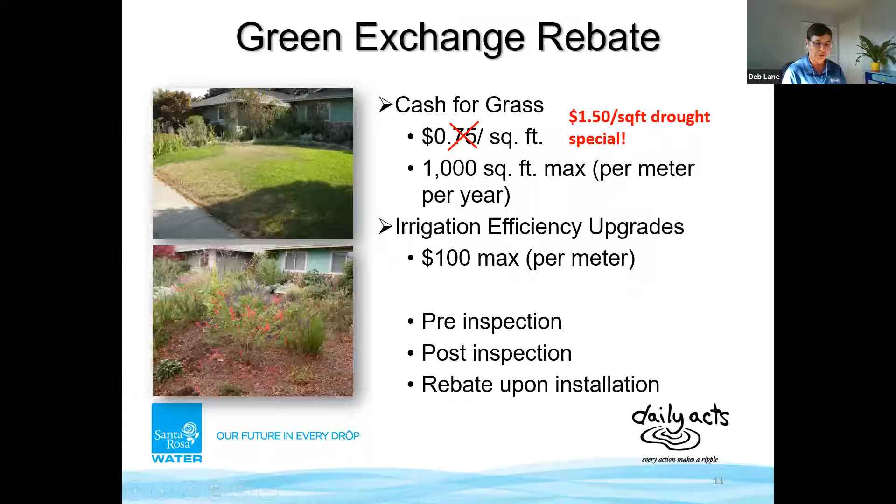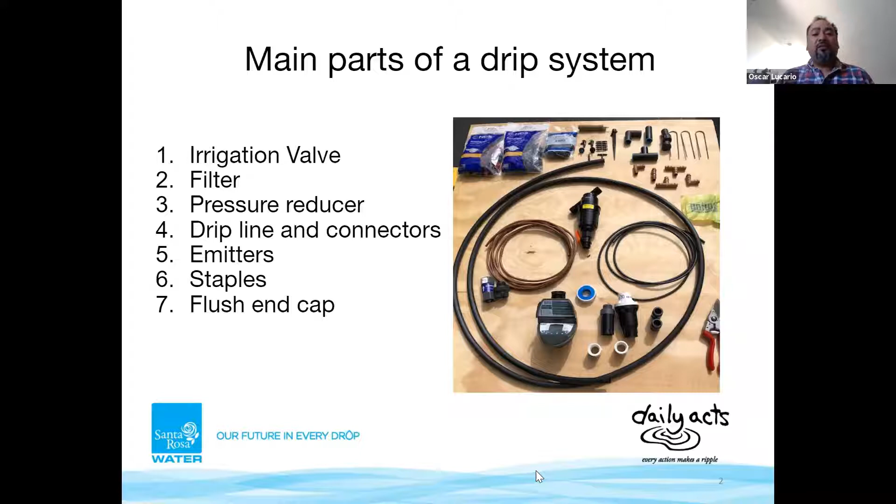For our drip system to work, we need to take that pressure and bring it down to about 30 PSI, which means we want to irrigate very slowly and profusely so it can really penetrate into the ground. Next to it, we have drip line and connectors.

There's several types of drip lines. The most common is polyvinyl. It comes in 1/2 inch, 5/8 inch, and there's a 1/4 inch small one.

We also have emitters that go along with the drip line system, staples, and very importantly at the end of our system, we need a flush end cap because we've got to maintain this system. Part of maintenance is flushing it once or twice a year, after the rainy season, to remove any contaminants or lingering dust that could be there.

So next slide, please.

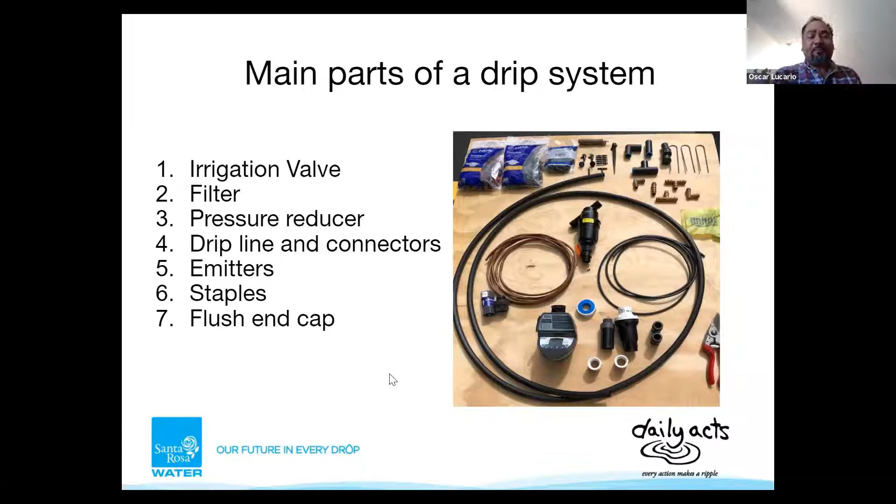Which means that when they're connected to a polyvinyl tubing at approximately 30 PSI, which is good enough pressure, within an hour of working they will drop about a gallon to 2 gallons, giving specific water needs to that plant, shrub, or tree, depending on how long we want to run the system.

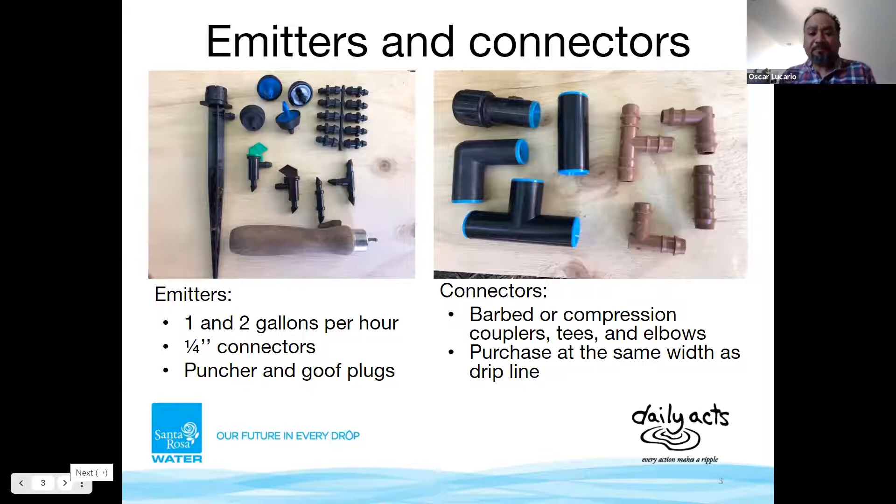Now we're gonna be talking about a drip line. So polyvinyl tubing, it's a pipe that comes in 50 feet, 100 feet, or 500 feet lengths. This polyvinyl is very inexpensive, and it's basically our hose distribution for water.

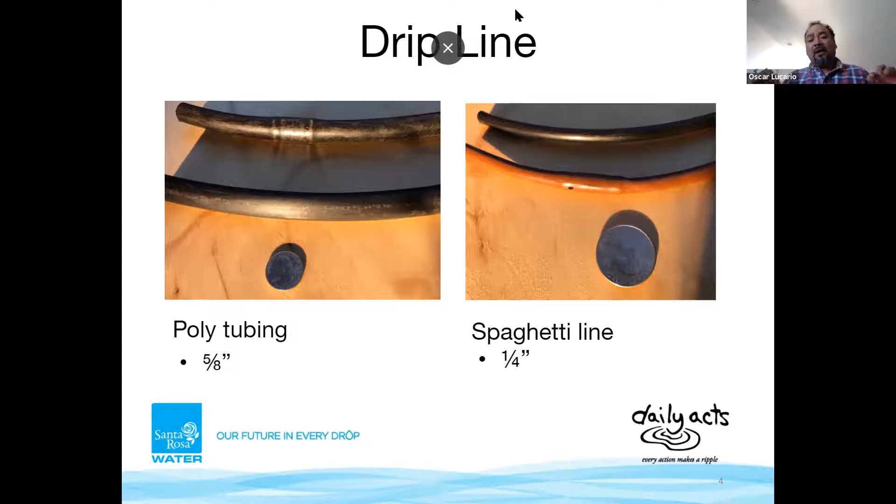Now, even though this is kind of tiny and mighty, it can provide so much deliverance of water when needed in areas like planters, veggie gardens, and raised beds. This tiny, mighty spaghetti line can do a lot of good work, and just because it's small doesn't mean it won't deliver what we want.

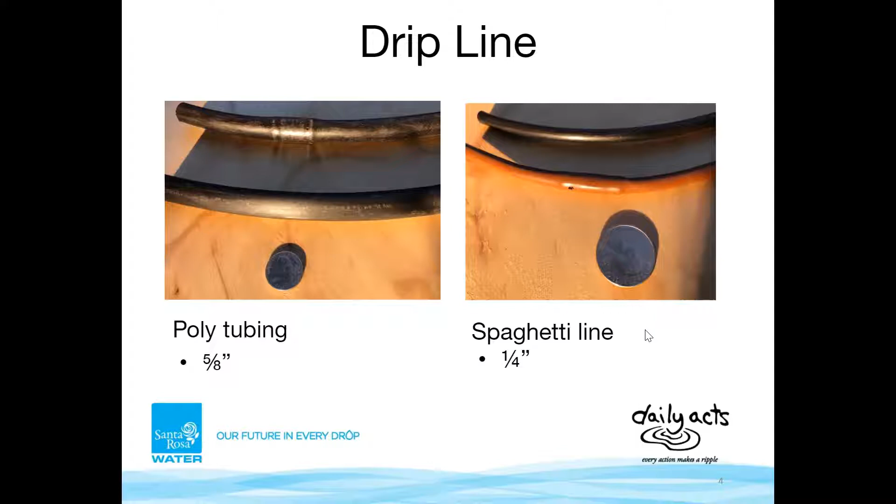Next slide, please. Oscar, I have a question for you from Linda Price. She's asking, how can I tell what size line I already have so that I can buy more, assuming she no longer has the packaging to see?

Oh my God, great question. I run into those things all the time. Previously, years back, we used to carry a 1/2 inch polyvinyl and then the 5/8. So what I recommend is you snap a little piece of that polytubing and bring it to an irrigation supplier and try to make it fit in a fitting.

Now, those fittings that you may find are 1/2 inch or 5/8. So it's one of those. And if it's the small one, that will be spaghetti line, which is a quarter of an inch. Thank you, Linda, for your question. That's a great question.

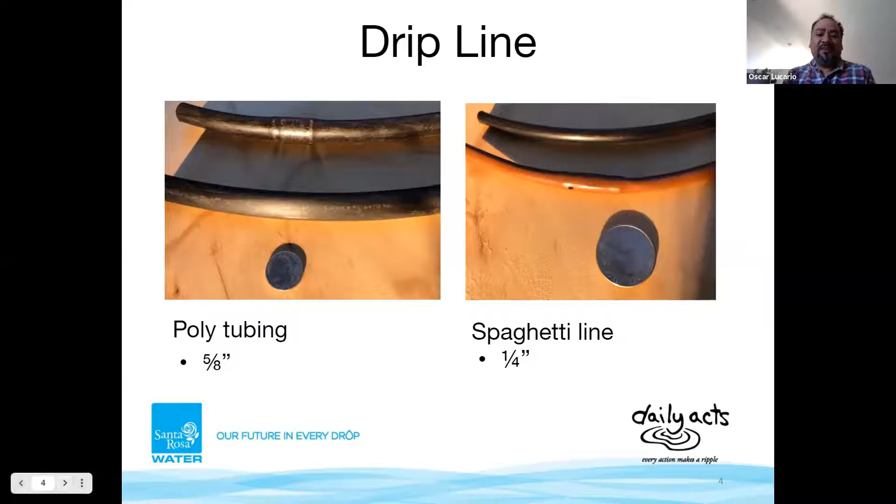So we explored some of those components that we use in our irrigation installation, but let's see how it all functions and how it all comes together. If you live in a residential area or a community place, like I live in a condominium, we share all of our green spaces with our neighbors, so we all kind of know where those irrigation supplies are because our kids play around the area. So if you live at home, you probably know where your valves will be.

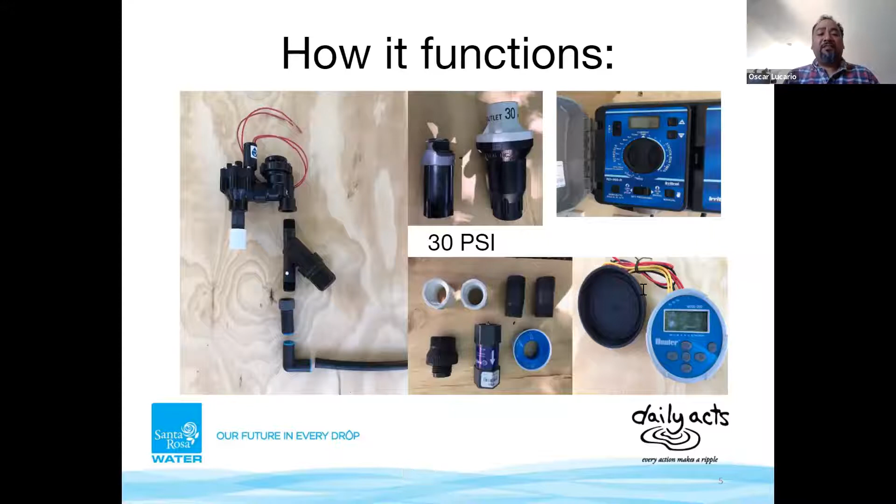To the left-hand side, it's an anti-siphon valve. It's basically one of the first components that your water will enter before it hits your garden.

The way it works, water comes in through the piping, goes into the valve. The valve has a solenoid, which means it works by electricity, put together by a timer. Depending on how we time or program that timer is how this valve is automatically going to open or close. Now, this valve also prevents any backflowing of water that has already been in the garden, so it actually functions as an anti-siphon valve as well.

After our valve, it goes down to a filter and also a pressure regulator that comes built into one piece. Now that piece is essential. As I mentioned, most of the water that comes to our homes comes at a higher PSI, pounds per square inch—60, 70, sometimes 100. And we want our irrigation to come down in pressure so we can deliver slow and steady water to our vegetation areas.

Then after that, it goes into a polyvinyl connector, and from there on, it's just polyvinyl tubing, emitters, and a flush cap. Now, you see here there are several types of pressure regulators. There are very expensive ones that are 30 PSI, about $20. There are some cheaper versions, about $7. Same thing with some of the check valves and pressure reducers—there's a whole variance in price.

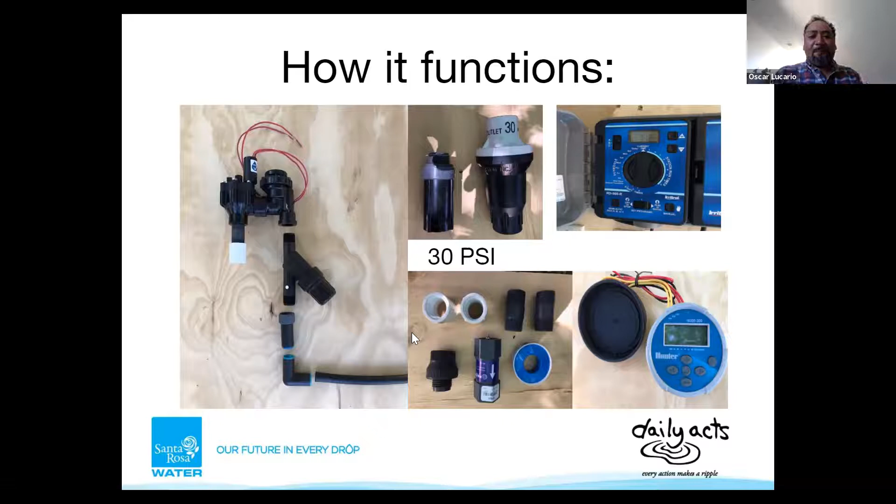I want to spend a little more time on the anti-siphon valve because it's such an important component. We want to avoid backflow of water from the irrigation landscape into the potable water at home. This anti-siphon valve works by a solenoid, or sometimes can be manual, but it still prevents water from the garden from coming into our drinkable water.

We want to protect our drinkable water because sometimes when you have lawns, we tend to fertilize them using petrochemicals. Certain chemicals, if they go back into the line, can not just corrode our piping, but we could also ingest them. There could also be herbicides and pesticides, so we want to make sure we have a good working anti-siphon valve for our project.

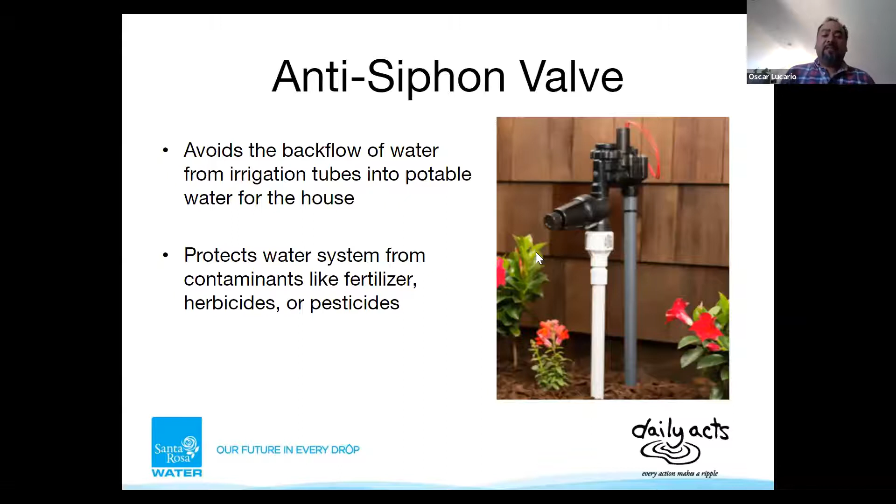We need to stop wasting water. We need to control our water in a better distribution way, which a drip system allows us to do, maximizing efficiency. Putting a lot of water too fast, too quick, doesn't really allow our irrigation water to go down into the ground to feed our plants, even our lawns. So we need to slow down the pressure and maximize an efficient way to deliver water specifically to a plant and conserve water.

To be honest, it's time to do it now, and what a better opportunity to walk away today with the idea to do that at home.

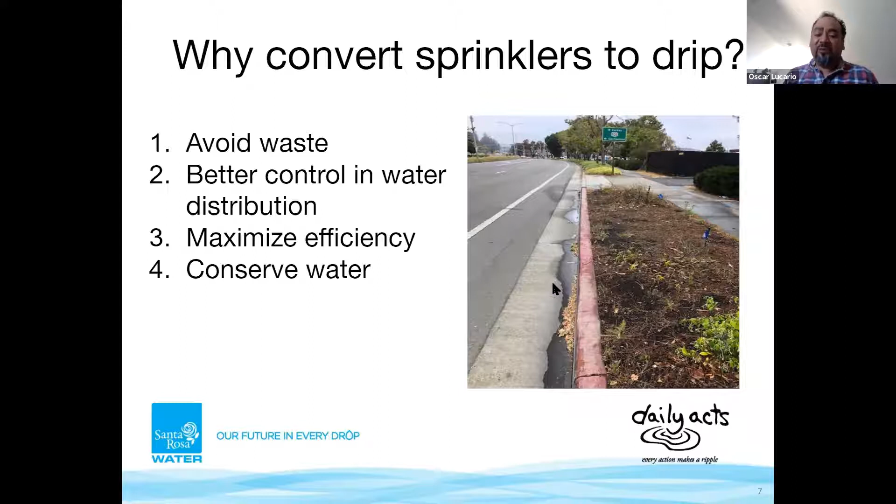Now, if you have a larger landscape, I like to call this the point source of irrigation. You use a solid polyvinyl line and only bring water to the specific root zone of a plant or shrub. It's very easy to install and affordable since it's just a solid line of polyvinyl tubing. When you get close enough to the plant you want to irrigate, you punch a hole and drop in a bubbler, depending on the water needs of that specific plant.

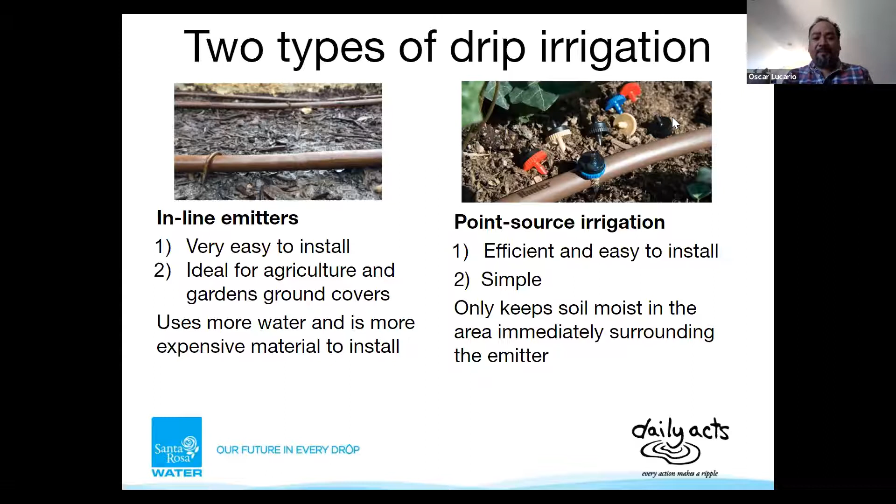Next slide, please. I am going to interrupt here with a question: how often should you change your filter?

That's a great question. The inline filters on the market nowadays come with a flusher screw cap, so I'd be cautious and do it maybe twice a year. If your system runs about 5 months out of the year—we turn on irrigation around early May and turn it off around Halloween—that's good irrigation for 5 months. So I'll flush it twice a year, every couple of months, to get rid of any contaminants, tiny plastics, or rocks that could cause malfunction to your emitter system. Good question, thank you.

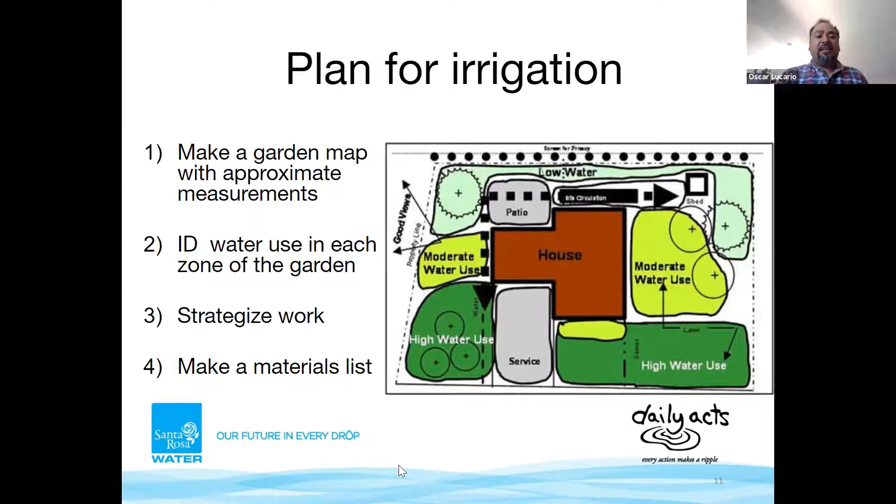So now we've talked about all the parts in irrigation and briefly touched on the areas within our home. It's time to make a plan of action, and that means we start with a map. This is kind of the coolest thing to do. It's time-involving and may be frustrating at times, but this is your framework—this is where everything really meets, and it's going to help you plan how you're going to assess what you have at home.

We start by making an aerial picture of your home. You measure your front yard, your backyard, and identify your hydrozones and the specific needs of your garden. Again, the specific needs of water in your garden or home tell us what type of irrigation, drip line, and volume of water we need to run in those areas.

And then number three—sorry, my Spanish comes through—we need to strategize the work, which means a drip line system is mostly about planning and thinking what technical supplies we need to get. But once you have a plan and a map, stick to it.

Because 5 years from now, when you're digging through these areas and you want to plant more fruit trees, you're going to run into your existing drip line, and you're going to be frustrated that you don't know where this map is. So please, keep this map along the way—it will help you be less frustrated in the future if you keep a record on it.

And then start making a material list. Once you take a measure of what you have, you can begin to think about your list and keep it in a way that works for you. Next slide, please.

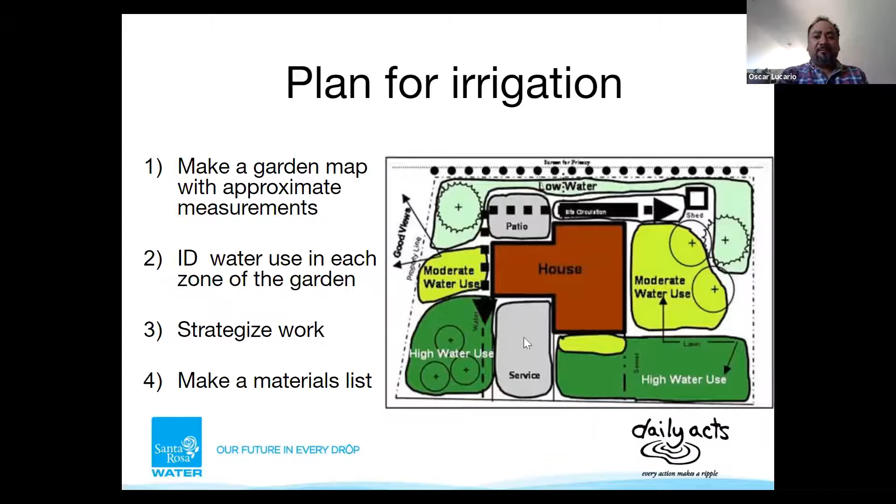So we're now at the point where we no longer see lawns being part of our landscape, given the water crisis that we're in. And the city of Santa Rosa has an amazing rebate program. So if you're interested in shifting your sprayer system from a lawn into a more ecological landscape, this is the time to do it.

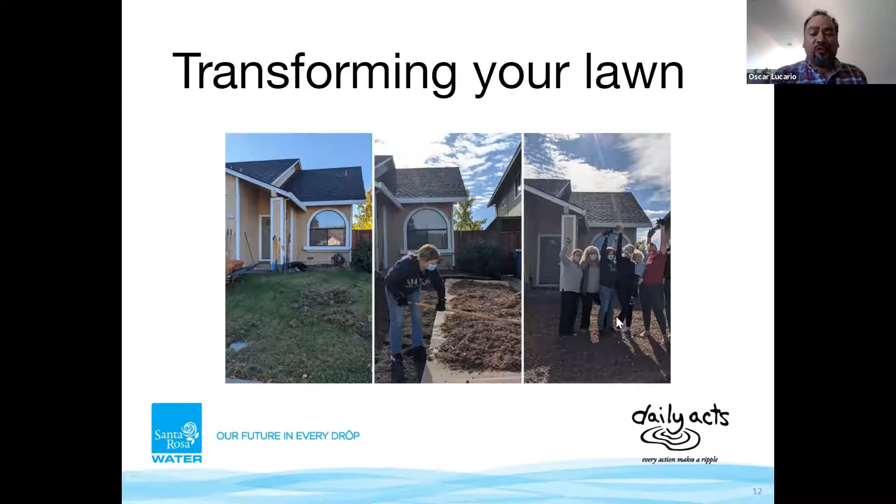So look at the opportunity at home when you see the browning of the grass. What can I do? What's gonna be the next step that is sustainable, that empowers me, that creates a better habitat and provides me quality of life? All these items can be put together by you, your friends, and your family to really empower your community and your home to be more resilient and more conscious of the time we're living in. Keep in touch with Daily Acts because they'll have some workshops coming up next. Next slide, please.

So imagine this: you have that browning lawn at home and you're like, okay, I'm done with this lawn. How can I turn this sprinkler system lawn into a drip line system? Well, a lot of people have done it—many suppliers already come with kits. But one of the main things we need to do is flag the sprinkler heads that you have in your lawn area.

Then basically we go and dig out and cap each of them, and we only keep about one—that's going to be your source of irrigation. That source of irrigation is going to have a filter and a pressure regulator. Again, when we use sprayers, we use a lot of pressure and flow to disperse water through the landscape. But drip irrigation is the whole way around—it needs to be slow flowing, slow to the ground. So it's a whole different view than what we're trained our eyes to do.

So part of it is to have a sprinkler-to-drip conversion system, and those kits are very easy to get. I'll point out some sources—not just businesses, but local hardware stores that may have them. It's really kind of a one-day project if you want, and it's a good way to assess what you have at home and make those changes as you decide what to do next with your landscape.

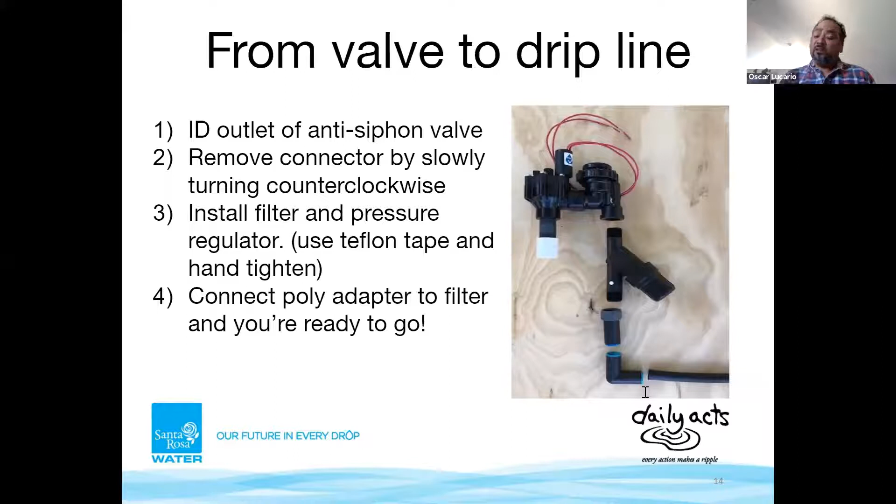This brings us to our next slide, which is how to set our drip system installation. This is the funnest part of all. You may require a collaborative effort, which means if you have a spouse, your kids, your community, your neighbor, this is a good time to call them in and help you out, because sometimes those rolls of drip line are quite heavy.

If you're thinking you're gonna put down a drip line to the front of your house, you may be talking about 200 linear feet of drip, and you may need somebody else to help you unroll the line. As you unroll it, you'll start using landscaping staples with a round top. The reason for the round top is you don't want to squeeze the polyethylene tubing when unrolling or installing, because plastic in a way has a memory, and if you constrict the flow of water, it can really affect how you deliver water to your system. You want to make sure your pipe is unrolling evenly without any effort. As you use your staples, make sure they go soft to the ground, maybe give it a pound or so to keep them in place every 2 feet or so.

Then the next thing to think about: once you get to your plant, you gotta decide what are the water needs of that plant. If you go to nurseries, I love going to Devil Mountain Nursery in Petaluma. They have an amazing assortment of plants, drought tolerant and native, and they even come with some water use information. So you get to think about how much water this plant is gonna need when it's new, and also the size of bubblers you're gonna be putting on each.

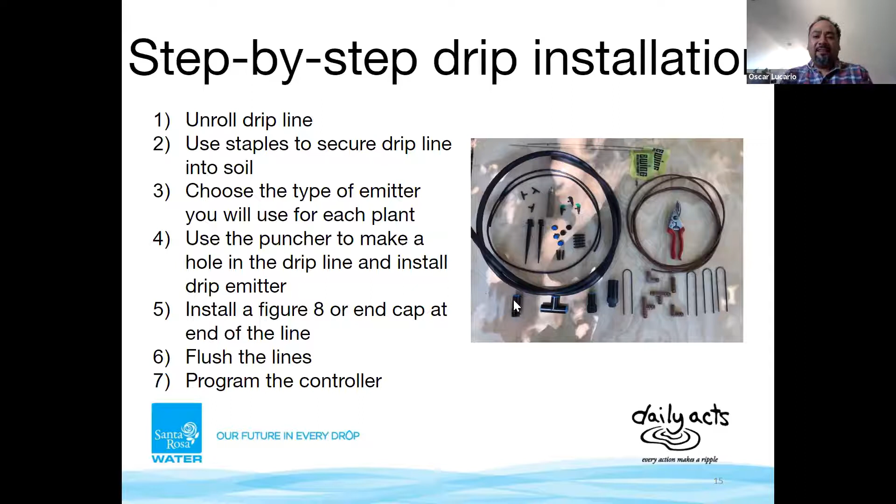I work with landscape, and water is an important resource, as well as soils. I want to spend a little time on this because without understanding the quality, the quantity, and the needs of our soil, any irrigation system you put out there, whether it costs $100 or $500, isn't going to get you the service you need. I hope this combination of soil, living soil, and an effective irrigation system will invite you to explore more. For that, I'm going to introduce you a little to what types of soils are out there.

Sonoma County has two very frequent types of soils. You have alluvial soils, which formed when volcanoes eroded and brought in amazing sediment that sits in the Laguna Plateau—an amazing agricultural type of soil. But you also run into clay soils. On the coast you run into more sandy soils, and silt is sometimes in between. There are also other growing mediums.

For example, what you encounter in pots or raised beds. What you have in a pot is potting soil, which isn't necessarily clay, sand, or silt—it may have some of that, but it's mostly medium. And when we have raised beds, like veggie beds, we always amend them with organic vegetable compost, so that's a lot of organic matter and less sand, clay, and silt.

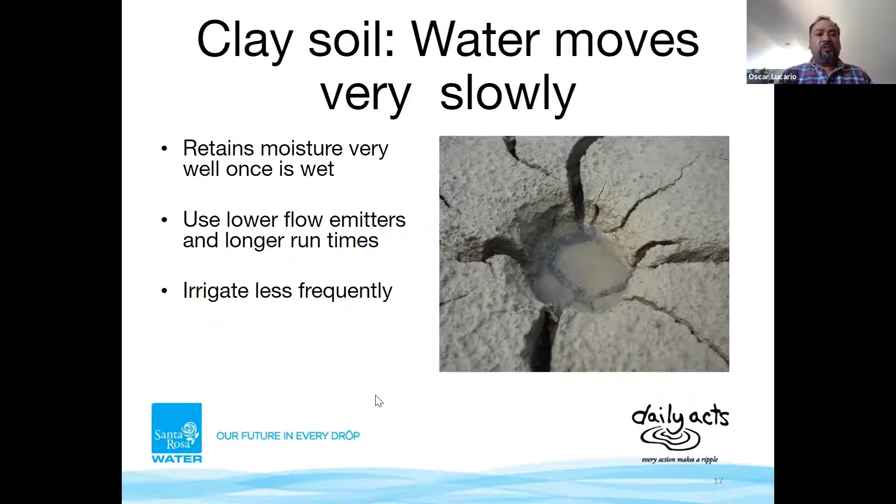So when we use drip line irrigation, we have to think about using very low flow emitters—instead of 2 gallons per hour, we can use 1 gallon per hour and double our time to allow slow percolation of that precious water into the clay soil. Also, because clay holds so much water, we don't need to irrigate as often—maybe 3 days in between, or about a week, which sounds pretty good for clay. You don't want to overdo your clay because it creates anaerobic conditions and can actually root kill your plants, so you need to irrigate less when you have clay soil.

You need to make sure your drip flow is nice and slow, and you have to understand that once clay is wet, it's going to take a long time for it to dry. Next slide, please.

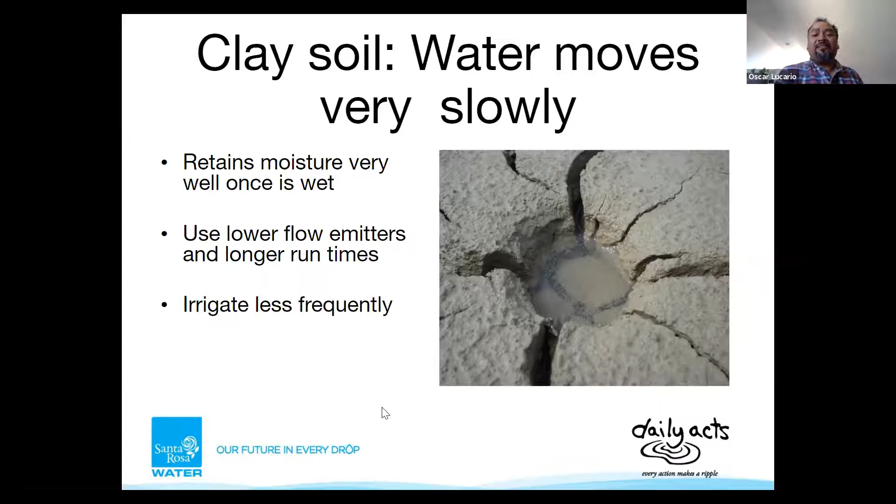So what happens if we have a sandy soil? Well, if you have an irrigation system working on a sandy soil, the water will flow through that sandy soil quite very quickly, which means we will pretty much be losing our water and our amazing moisture in our soil.

So what does that mean if we have a drip line system and we have sandy soil conditions? We need to irrigate more frequently, maybe for short amounts of time. Maybe water with 2 gallons per hour for half an hour, then program again for another half hour in 3 hours from that day. So you split that water so you don't just lose all your precious water down to nowhere, and you actually get to deliver it at the root zone.

So what I mean about the root zone - it's a great question. The most activity in bacteria and microorganisms is within the first 6 inches of your soil, any type of soil, which means that's where you want to keep the water available to plants. That's where you want your drip line to be slow, bringing that water down into the infiltration of that zone. And if you have sandy soil, you can drop in a gallon, stop, let it go, and then 2 hours later drop in another gallon instead of having 2 gallons at once. So that will be my consideration when dealing with sandy soil.

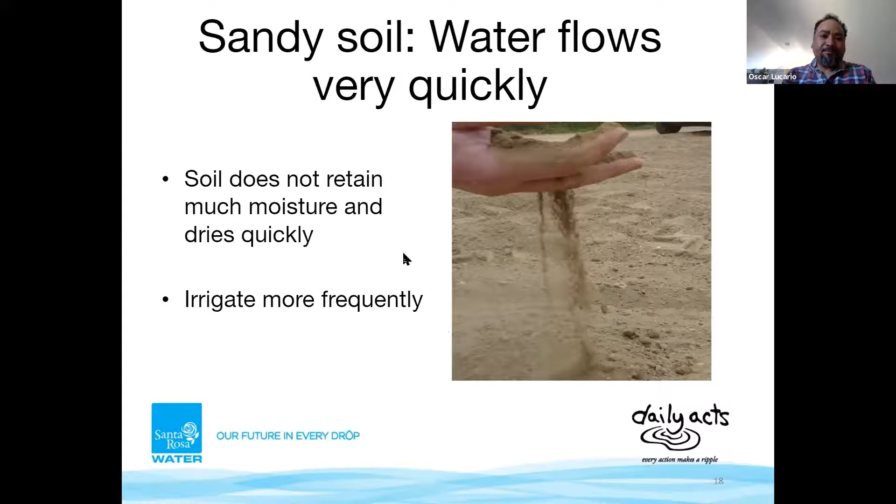And then there's in between, right? There's no just black and white, there's the in between. And silty soil - there's an amazing story about it. Many of our cultures throughout the world started agriculture because they lived next to banks of sand, next to rivers, and it was not necessarily sand, it was silty soil, which means all this organic matter just flowed around the rivers and provided tons of nutrients.

So it holds water beautifully, better than sandy soils. The fertility of silty soil is amazing. The only bad thing is that it erodes quite easily if you don't have the right irrigation, which means if you use overspray, your silty soil will be running away from it. So when you have silty soil, you want to protect it. You want to make sure your drip line system is that in between - not too fast, not too short, but steady - protecting your amazing silty soil from eroding.

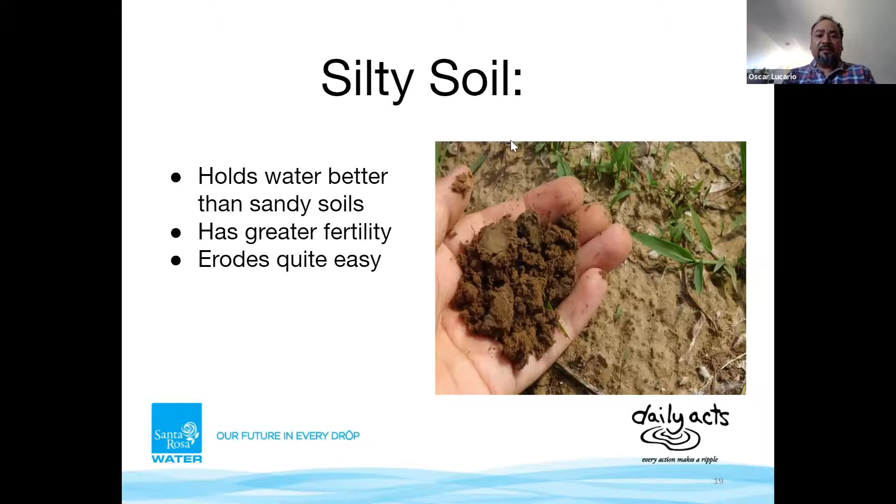And here's one big example. I live in a small backyard and I have raised beds. My raised beds are made of a medium, which is between potting soil, existing native soil, and compost. And I grow vegetables at home with my kids. So I have a medium - nothing in between clay or sandy or anything like that. We have just an amazing medium to grow.

And this is particularly interesting to me, because when we have plants in the landscape, we don't go and see how they're doing with water needs. But if we have our veggie beds and pot plants, we're always checking on them. So it's actually where they are located that we keep our eyes on it. That's what I want you to know - it's going to take you, the person putting in the irrigation system, to observe and adjust for overwatering. Most of the time, you want to slowly provide that water and infiltration at a nice low rate, so all the efficiency of the water goes everywhere. Speed is the main key for irrigation - you want slow and steady.

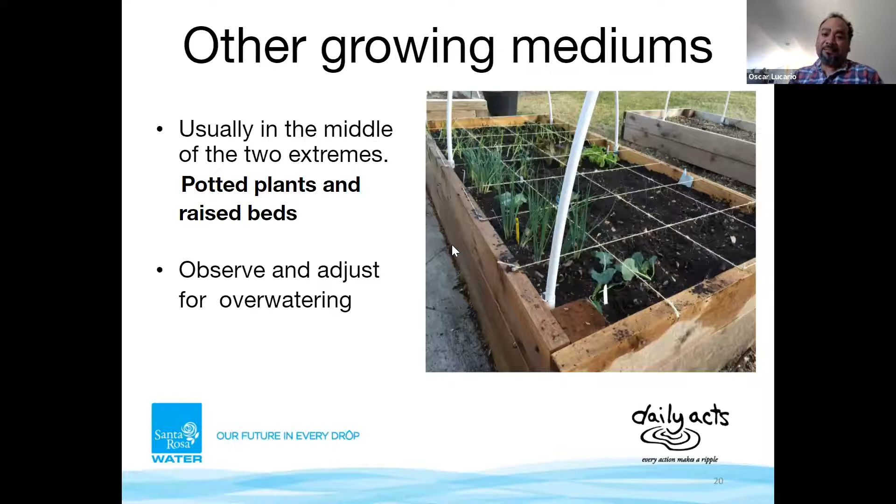And again, to wrap up this, almost getting close to my point here. When we irrigate, we're providing water, which is an incredible element. But we need to nourish also our root system, and we need to nourish our soil. We've got to make sure that water we just put into the ground really conserves its moisture. It provides an amazing benefit to our plants, to our veggies, to our community.

Even to our lawns. So using compost bedding, I try to do it once every 2 years - I provide about an inch or so of compost through my garden beds, through our community gardens here as well. We provide that to shrubberies. So when the irrigation system goes on, or when it rains, all these nice elements in the compost become available to our plants. And on top of that, we put a layer of 2 to 3 inches of mulch.

I'll go a little bit into mulch when we come to the slide. This mulch provides a layer of protection from losing too much water to evaporation. Plants evapotranspirate and are constantly losing water, and if the soil doesn't have a layer of protection, the water just evaporates. So allowing yourself to provide compost and mulch, and nourish the soil with an effective drip line system, you're gonna be golden. You're gonna be in the right way of providing beauty and sustainability for your garden.